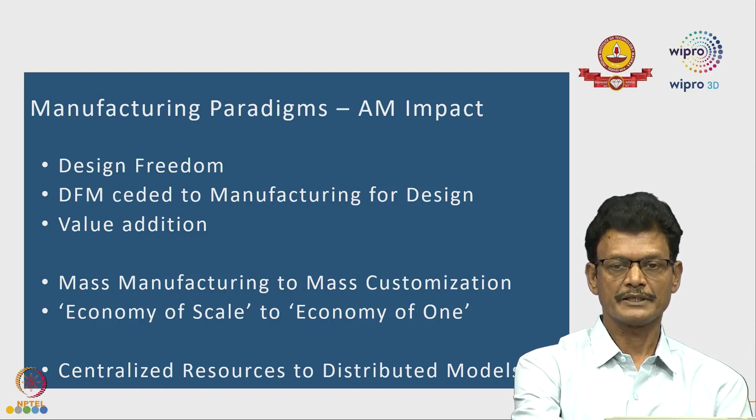And one more important phenomenon that we have observed in recent times is that because of the introduction of additive manufacturing into the product development cycles, the dependence on centralized resources has become insignificant. We are seeing more and more case studies where distributed manufacturing models are coming to the rescue of accelerated product development cycles. So in this program, I am going to talk about various AM technologies.

If you are talking about additive manufacturing technologies, you have a plethora of options, right from tabletop machines to completely matured systems for industrial contexts. And concurrent to this development in the variety of additive manufacturing systems is the choice of materials. We can work with metals, plastics, ceramics, waxes, composites, and so on. A portion of my presentation would also be capturing these material options.

The process chain of additive manufacturing is very important because we need to account for pre-processing, part building as well as post-processing. All of them significantly contribute to the technical case and business cases. So I will be discussing this with the help of a few contemporary examples. And the important thing that we have seen in recent times is that additive manufacturing is equally useful to a micro or small scale enterprise as it is to a large engineering conglomerate.

It is important to find out the value addition opportunities, and once you identify them, it is possible that you can even think about configuring the supply chain models. So a lot of inputs to the deliberations on the technology are inspired by my firsthand experience while doing certain projects and missions both for Wipro 3D and DRDO.

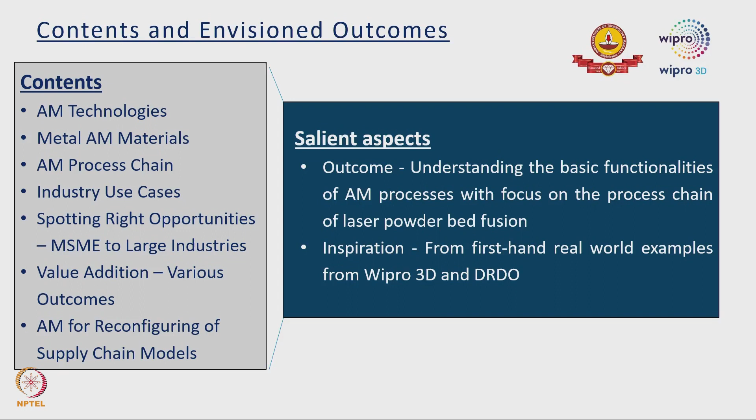Now, let us examine the positioning of additive manufacturing in the landscape of manufacturing. In the current IoT-enabled, Industry 4.0 dominated scenario that is prevalent in manufacturing systems, we are talking about optimizing resources, improving machine utilization, real-time sharing of information based on tremendous sensorization, ubiquitous computing, and more importantly rapid elasticity.

If you just contrast the scenario with that of the early models of manufacturing, where the focus was only limited to increasing production and reducing labor costs, it has been a tremendous metamorphosis. The early models of additive manufacturing came into existence way back in 1980 itself. In fact, the first ever patent for the concept of an XYZ plotter could be credited to Kodama from the Nagoya Municipal Industrial Research Institute in Japan, wherein he talked about producing a three-dimensional plastic object directly from digital definitions.

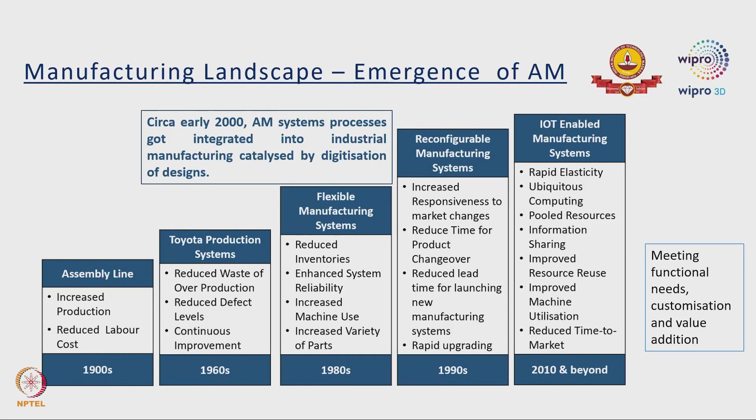So, today we are not looking at usage of additive manufacturing technology only for the sake of prototyping or for design visualization. We are looking at more powerful models through which additive manufactured parts can fulfill the end use needs or functional requirements of real world applications.

Now, if you look at the important aspects of additive manufacturing, there is a distinct phase where we are looking at only digital information. In the initial phase of the process of additive manufacturing, we are working on digital models or CAD models and slicing these models into series of layers mathematically using certain customized software solutions. Subsequent to that, the sliced data is converted into thin layers out of plastics or metals sequentially, so that digital definition is translated into physical part.

So, the point which is to be appreciated is there is a phase which is working only on the digital data, and there is a phase which is largely confined to physical models.

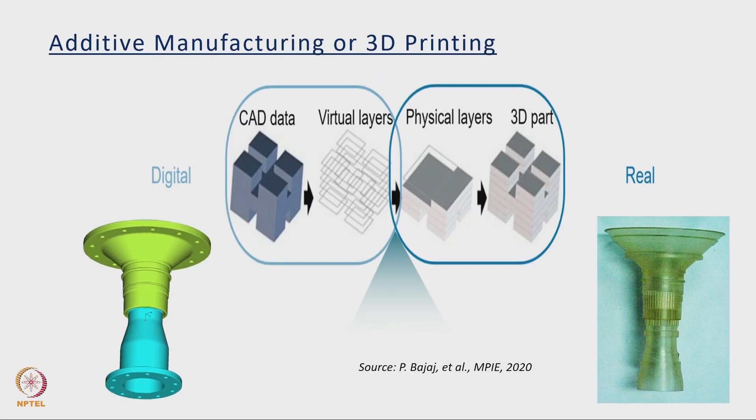It is interesting to know that initially when this technology came into existence, it was more known as rapid prototyping technology. In course of time, several phrases were used to refer to this technology, including layered manufacturing, solid freeform fabrication, and the terminology called 3D printing came into existence because of the research group of MIT that were talking about producing the additive manufactured parts using jetting kind of a principle or inkjet kind of a principle out of plastic materials. But currently the terminologies like 3D printing and additive manufacturing are used fairly in interchangeable manner.

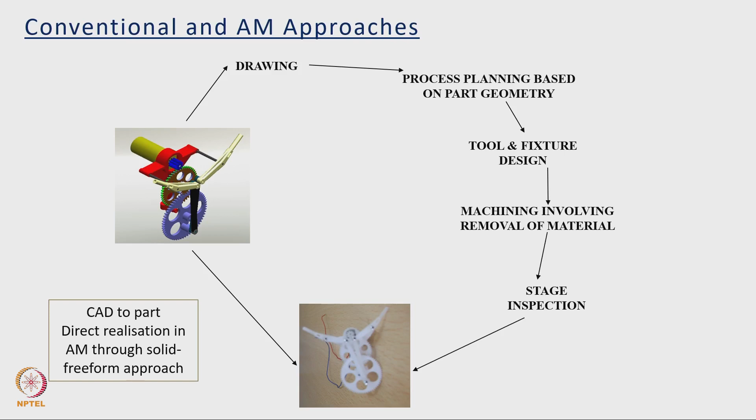So, if you are looking at the conventional manufacturing, what is very apparent is it's sequential from the stage of drawing to the stage of the realization of a part. There are certain steps you sequentially need to follow, including development of the toolings, fixtures, machining, which predominantly involves removal of the material, stage inspection depending upon the complexity of the geometry, and final realization of the part. In contrast to that, additive manufacturing or 3D printing tend to be one step solutions, that is direct translation of the digital data into physical part in a solid free form approach.

So, what is the formal definition of the additive manufacturing? As per the standard ASTM F2792 released in 2009, additive manufacturing can be described as a process of joining materials to make objects directly from the 3D CAD model data, usually layer upon layer, as opposed to the subtractive methodologies. This standard has been replaced by the ISO ASTM standard 52900 released in 2015, but the definition remains the same.

As I mentioned, the terminology 3D printing was coined by the group at MIT, Emanuel Sachs, in 1993, and the Fraunhofer Society is credited with the development of the selective laser melting process through which you can work on range of metallic materials.

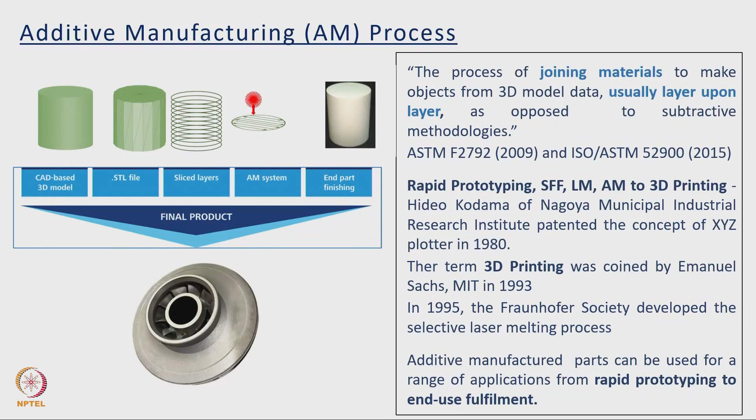And if you look at the materials that can be processed during additive manufacturing, you can see three important categories. Right in the center we have got metallic materials that can be processed through powder bed fusion or binder jetting or direct energy deposition, and you have got a set of processes which are connected with thermoplastics and thermoset plastics, and the others could be connected with processing of sand, glass, composites, fiber optics, even organic tissues. I have shown three examples in this case.

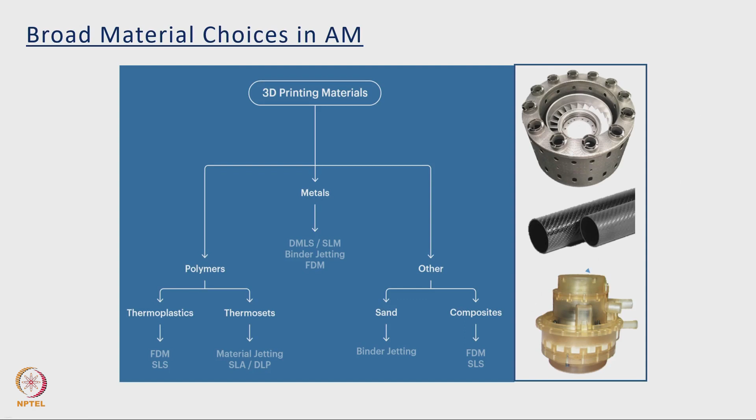Right on the top is the flame tube, which is made from high temperature nickel superalloy made through powder bed fusion. In the bottom you see a transparent bearing housing. In the center you see a composite piping with a thin wall realized through 3D printing out of PEEK like materials.

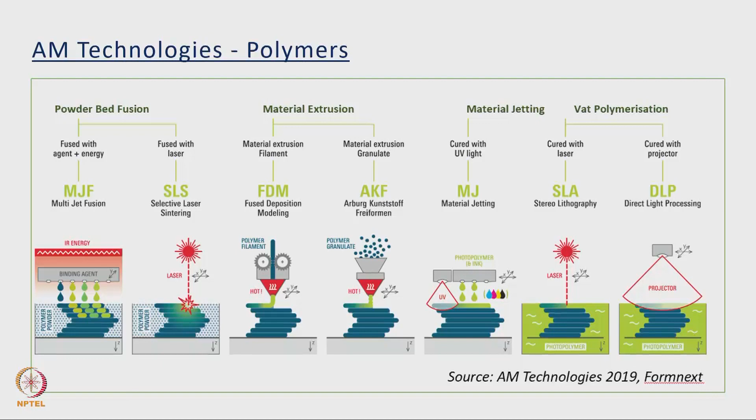So, if you look at the possible options in processing of polymeric materials using additive manufacturing, you can see the important technology that has been available in the commercial form right from early 90s is the VAT polymerization technology. Then you have got extrusion technology, wherein filaments are extruded into the physical parts, and you have got a material jetting technology wherein the plastic materials are jetted out, and the fourth option, a versatile option, is the powder bed fusion. It is also more popularly known as selective laser sintering, which involves the usage of high energy sources for realization of the polymer parts.

Now, let us look at the options connected with metal additive manufacturing. Predominantly you see two varieties in the commercially matured form. The first one is the powder bed fusion, wherein you spread thin layers of powder on the build platforms, make use of high energy sources, could be lasers, could be electron beams, for melting of these particles which re-solidify as the beam passes along.

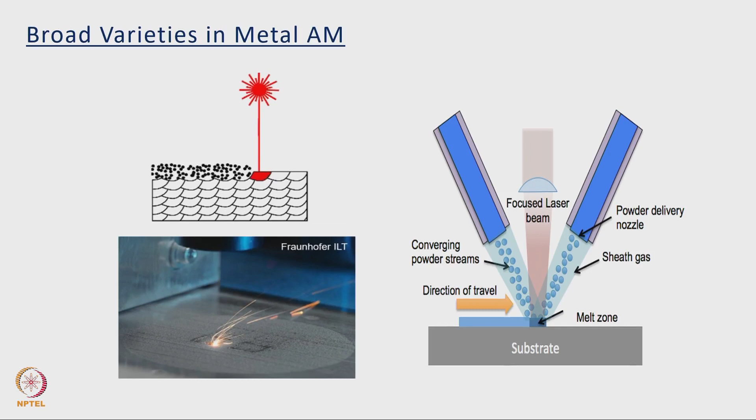On the other side we have the direct energy deposition process, wherein into the stream of the high energy source you are injecting fine metallic particles. So these are two distinct processes used in the world of metal additive manufacturing.

If you look at the categorization of key metal AM technologies with reference to NASA's publication of 2019, you can see three categories corresponding to powder bed fusion, direct energy deposition, and solid state. An important thing to note is the feedstock in case of direct energy deposition could be in the form of powder or wire, whereas in case of solid state it may also involve a foil.

There are a lot of interesting options continuously emerging, but one important option, especially with reference to repair and refurbishment of worn out parts, is the direct energy deposition technique. The cold spray technique, wherein fine powder particles are accelerated in a high velocity compressed gas stream, is one of the emerging options. These particles, upon impact with the substrate, deform and bond together, creating a layer and eventually a predefined geometry.

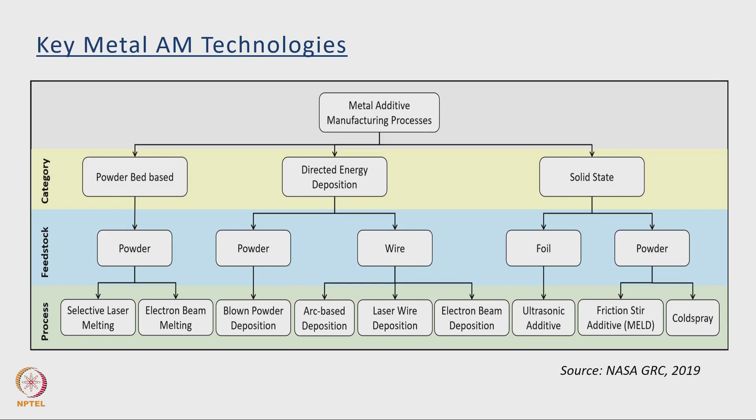So this represents a synergistic combination of conventional manufacturing with additive manufacturing, and this approach is becoming more and more popular as a hybrid engineering approach.

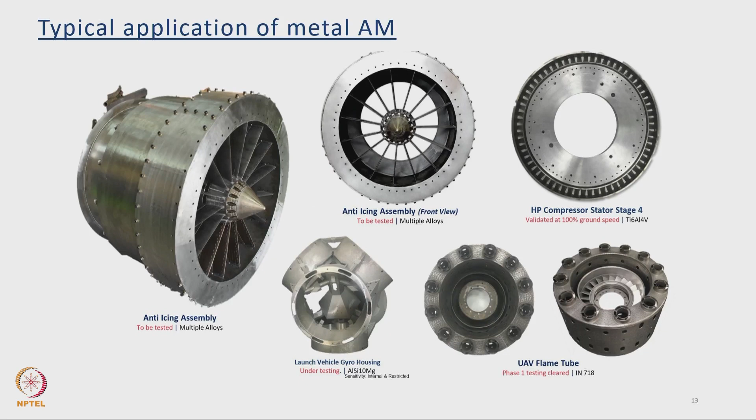If you look at the formal categorization of additive manufacturing technologies as per ASTM ISO standard 52900, you see seven distinct categories of technologies, including vat polymerization, material extrusion, powder bed fusion, material jetting, binder jetting, directed energy deposition, and sheet lamination.

Each of the technologies comes with its own set of possibilities, merits, and associated challenges, but it is very important to note that you need to pick the technology and the material depending upon the application you would like to serve.

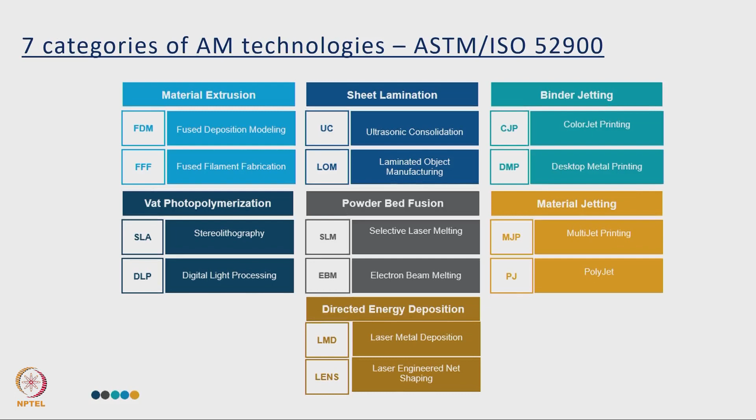One of the recent examples I would like to project is connected with the development of face shields, a very important product during the pandemic situation. The supply chains were severely disrupted, and what you see here is a custom developed face shield with limited access to the supply chains, using multi-jet fusion technology for protection of face, eye, and nose.

Despite the fact that there was no access to injection molding resources in these disrupted times, the MJF technology was used to produce close to 1500 pieces per day.

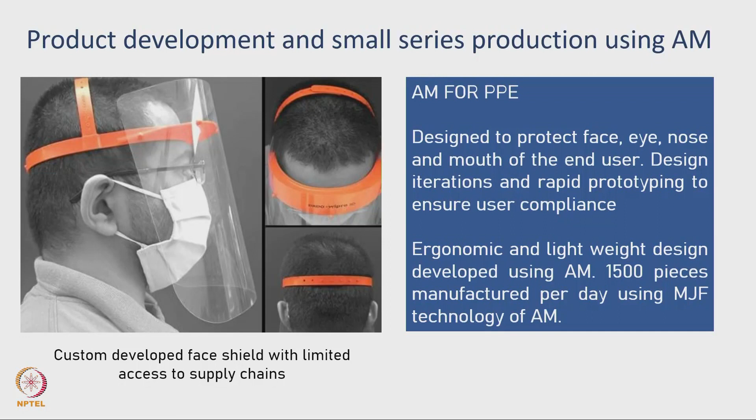In this technology, a fusing agent is jetted selectively where plastic particles need to be processed, and a detailing agent is jetted across the contour or periphery to get top notch geometrical definition. Fundamentally it can process polyamides and also thermoplastic polyurethane kind of materials in steps of 80 micron layers, and small series production of this kind is greatly facilitated using the additive manufacturing technology of multi-jet fusion.

The other example I would like to give, connected with an industrial context, is the application of a stereolithography part. Stereolithography is part of the vat polymerization context. You can see on the left side a full scale bearing housing.

The material is a photocurable resin and it happens to be translucent, so you can even see the fluid motions happening within this part. This full scale bearing housing has been fitted in an attitude test facility, and the movement of fluids within this full scale model of the bearing housing were captured for flow visualization studies.

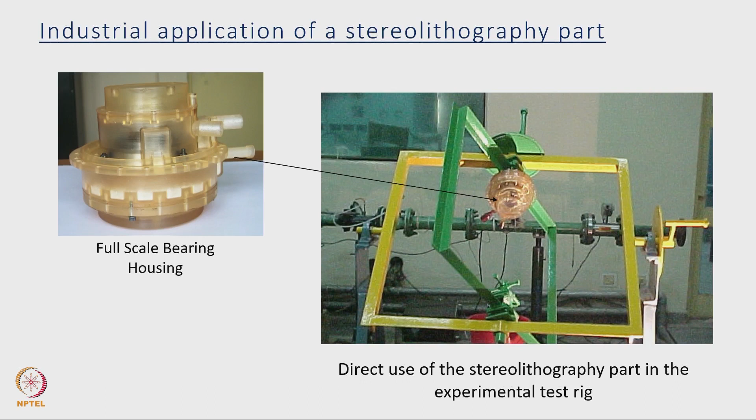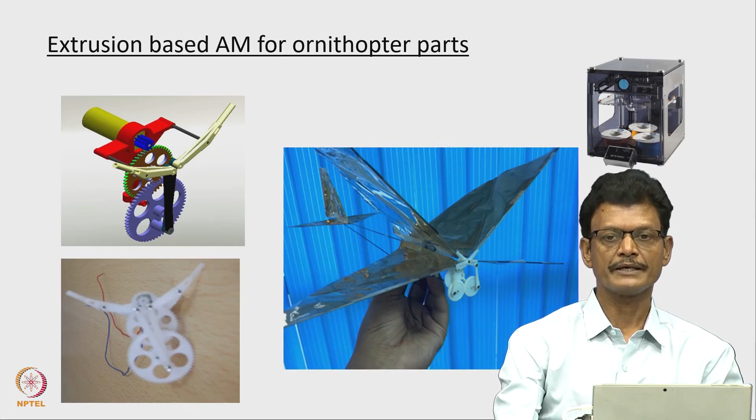So this represents one example wherein a part made out of additive manufacturing was directly used as a test article. The next application is connected with fused deposition modeling, one of the ubiquitous methods of additive manufacturing.

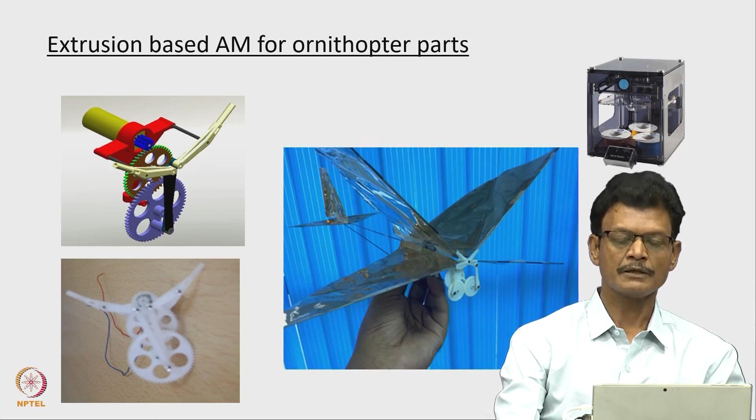In this case, the parts can be made out of thermoplastic materials like polycarbonates, PLA, ABS, glass filled nylon. What you see is a micro sized transmission gear wheel assembly realized directly using fused deposition modeling, fitted into an ornithopter for converting rotary motion into flapping motion of the wings. This ornithopter is ready for field application to demonstrate the thrust and lift generated by this configuration. This is one more example of direct utilization of an additive manufactured plastic part in a real world context, without dependence on conventional tooling and manufacturing processes.

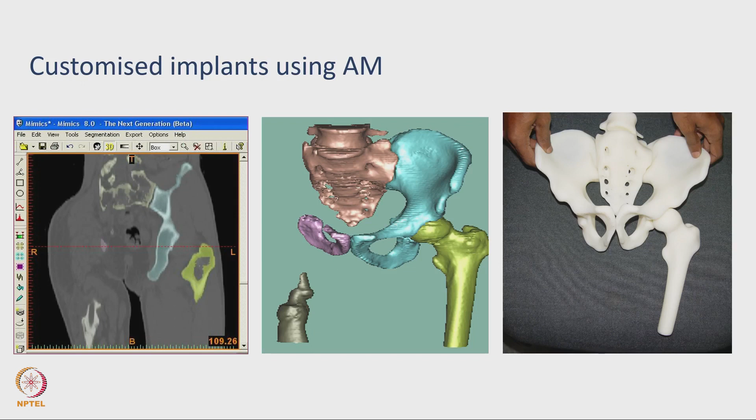This is an example corresponding to customization of implants. You can see here the X-ray data of a patient who has lost a significant portion of the pelvic girdle, and this is the 3D visualization. On the right side is the translation of the reconstructed CT data into a full scale thermoplastic assembly made through fused deposition modeling out of ABS material. This is used both for communication purposes as well as surgical planning - one more example of using an additive manufactured model for planning a complex surgical procedure.

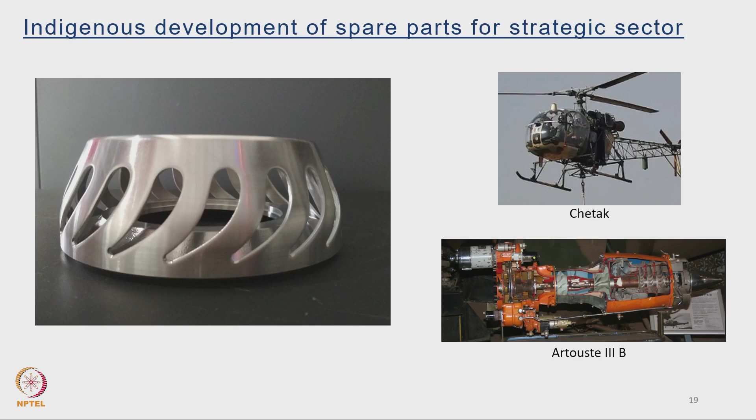This is an interesting example corresponding to development of spare parts for legacy systems. In this case, the stakeholder had access only to the used part, so the geometry had to be captured using 3D scanning, and using that as a reference, the part was made out of powder bed fusion using specialty steels. This is an excellent example of developing reliance in case of spare parts for strategic sectors.

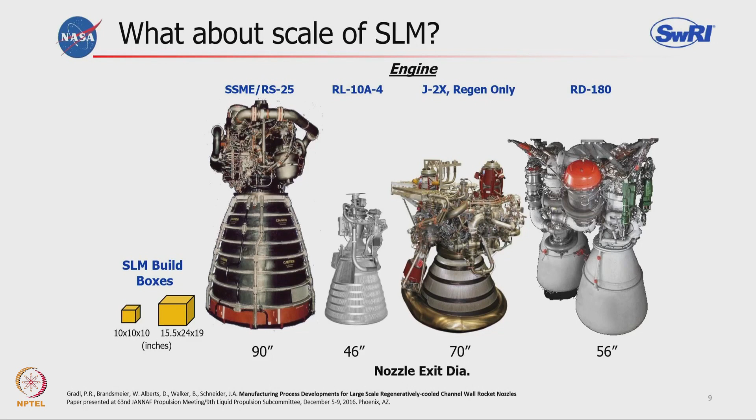There were size limitations in the initial stages because the concept of design for additive manufacturing was still evolving. But if you look at the current set of applications published by NASA in association with the Southwest Research Institute, there seems to be no apparent limitation with reference to the size of the part that can be tackled using additive manufacturing. In the RS-25 engine project of NASA, parts as big as 2.5 meters in diameter with a wall thickness of 6 mm have been realized using additive manufacturing.

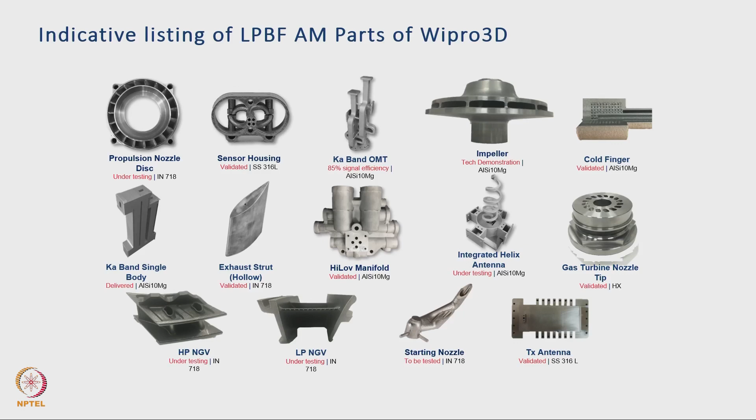The common denominator to all these applications is that the geometries are relatively more complex. In these cases, if you were to rely on conventional manufacturing, the waste associated with converting your design into the part could be significantly high, because you start with a block of material and remove unwanted material with geometry specific tools and processes, and in the bargain you are continuously generating waste.

In contrast, if you employ additive manufacturing for translating designs into parts, especially in case of complex designs, the waste could be significantly less, because you are only adding material at the location of necessity. And hence, in the context of aeronautical systems, a phrase called buy-to-fly ratio has become extremely relevant - the amount of material that you are buying compared to the amount of material which is finally used in the system that is flying.

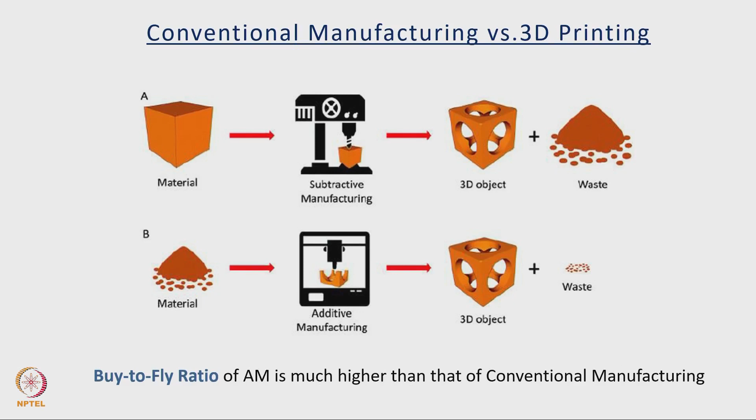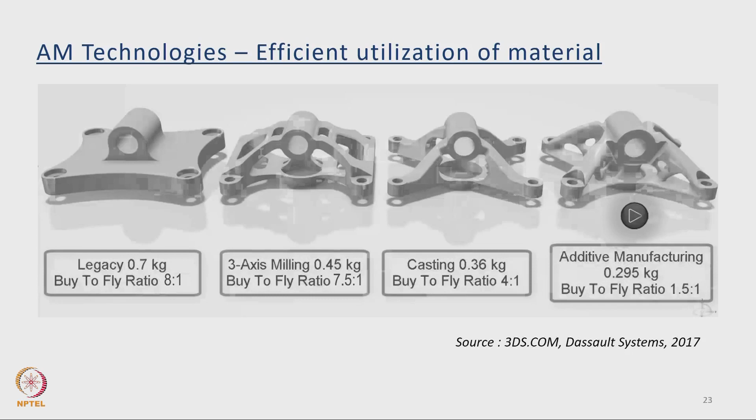In case of conventional manufacturing, the buy-to-fly ratios, whether you are talking about milling, casting, or sheet metal and machining, could range anywhere between 8:1 to 4:1 depending on the geometry of the part. But if you apply the principles of design for additive manufacturing as an alternative to conventional manufacturing, it has been seen in some cases the buy-to-fly ratio could become as favorable as close to 1:1. Coterminous with this concept is also significant reduction in weight, which adds to the overall impact on the system.

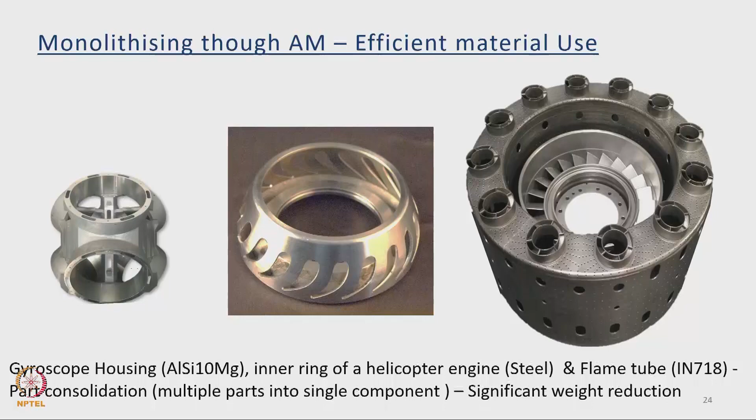One very important thing associated with the application of powder bed fusion in aeronautical systems is the concept of monolithizing, or converting multiple parts into a single part. It is also known as part consolidation, whether you are talking about a flame tube or a complex shaped gyro housing. What has been seen in these cases is significant weight reduction opportunity through consolidation, and the functional requirements may also get additionally augmented.

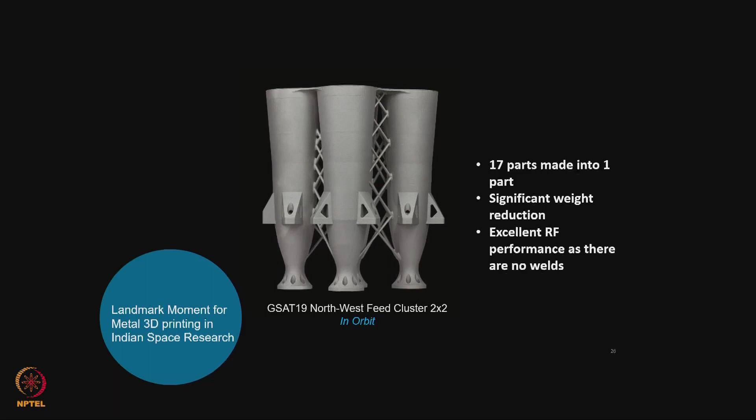So, here is a case study corresponding to the GSAT-19, a communication satellite of ISRO, launched into orbit in June 2017 with a mission life of 10 years. The part shown here is the northwest feed cluster made out of aluminum alloy called AlSi-10Mg using powder bed fusion at Wipro 3D in close association with SAC Ahmedabad.

In this specific case, 17 different parts of the feed cluster were combined into a single part. Naturally, it resulted in weight reduction, significant reduction in assembly effort, and hence compression of the overall development cycle. More importantly, because of the absence of welded joints, the RF quality of the additive manufactured part turned out to be quite superior to the conventional part.

Because of these examples and possibilities, we have seen global leaders like GE giving a new shape to the manufacturing cycle in case of the fuel nozzle, an important part of the LEAP engine, wherein this specific part made out of cobalt chromium alloy has undergone a tremendous change as far as the process is concerned, because of the infusion of powder bed fusion process into the development cycles.

As of 2018, GE has reported that more than 30,000 parts, the nozzle tips, have been made using additive manufacturing, using more than 40 plus metal 3D printers in a 300,000 square feet facility, and each of the LEAP engines contained 19 of these 3D printed fuel nozzles.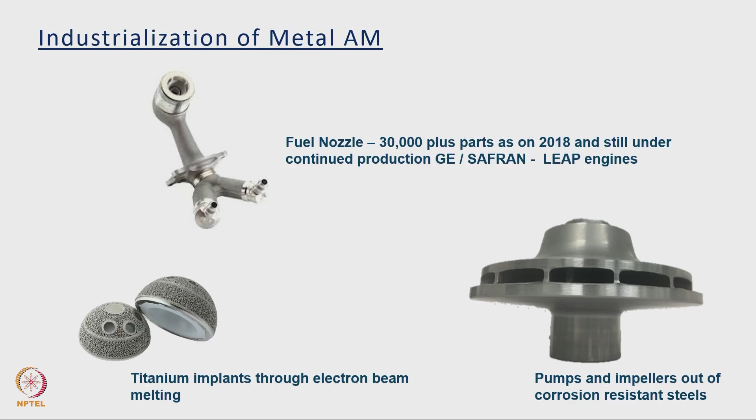And one more significant observation from the energy sector is the manufacturing of pumps and impellers out of corrosion resistant steels. Rather than depending on traditional inventory maintenance systems, they are producing the parts just in time and delivering at the point of care or point of need.

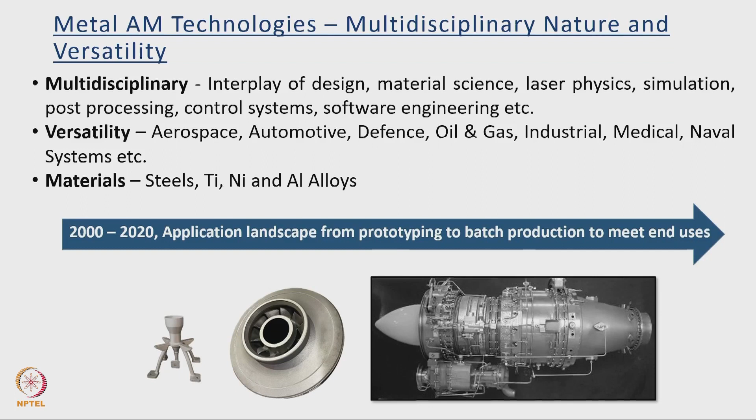So, the current usage of metal additive manufacturing in an industrial context has become an interplay of design, material science, laser physics, simulation technologies, post processing, control systems and software engineering. And you are also seeing a continuous shift in the application landscape from prototyping to batch production so as to meet the complex needs of the end users.

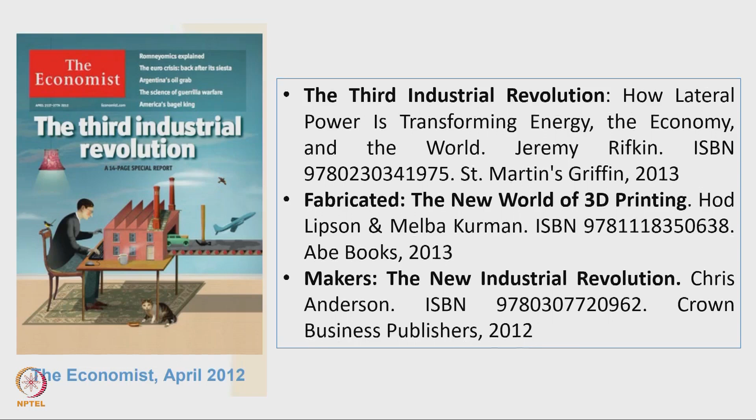Reflecting this kind of improvement in the usage pattern of additive manufacturing, several publications have referred to 3D printing as the third industrial revolution. And during the 2010 to 2015 time frame, many impactful publications brought out how this technology is enabling the next industrial revolution.

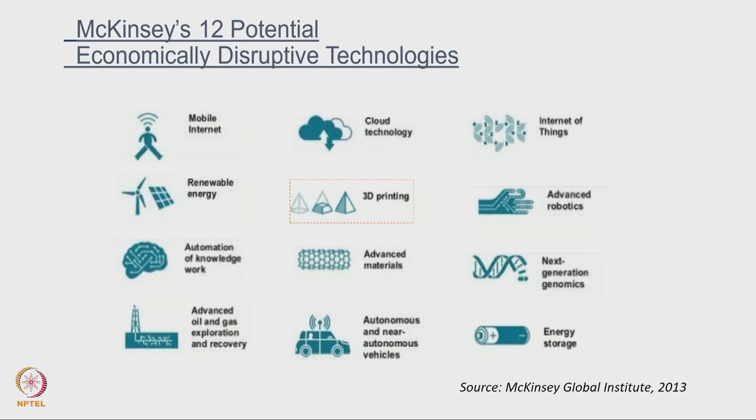One of the important references in this case is the report of McKinsey Global Institute in 2013, wherein 3D printing was placed alongside other disruptive technologies like cloud technology, Internet of Things, renewable energy, advanced materials and energy storage solutions as one important technology that can bring disruption into the way future businesses are run.

So, there was a phase which is synonymous with disillusionment, and we are in a phase where users are able to understand the possibilities in a much better way, and they are also able to spot the specific instances where induction or infusion of this technology can produce parts with the necessary technical as well as business impact. So, what are those instances?

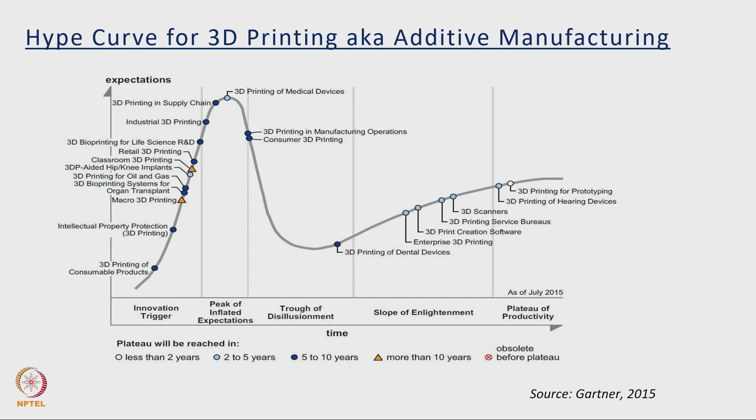When you are talking about aeronautics, there are many gas turbine manufacturers who are able to produce the parts connected with the turbine, combustor, exhaust and compressor modules with a lot of discernible impact on the time compression using powder bed fusion technology.

And they are also able to make use of direct energy deposition technology for repair and refurbishment of worn out parts. We have seen in the automotive sector, especially in the case of electric vehicles and motorsports, metal additive manufacturing and plastic additive manufacturing technologies are repeatedly used for producing even one-off parts and maintaining the competitive advantage compared to the peers. As I explained, in the case of the medical industry, surgical implants and customized solutions for orthopedic, maxillofacial and craniofacial applications are becoming more and more prevalent.

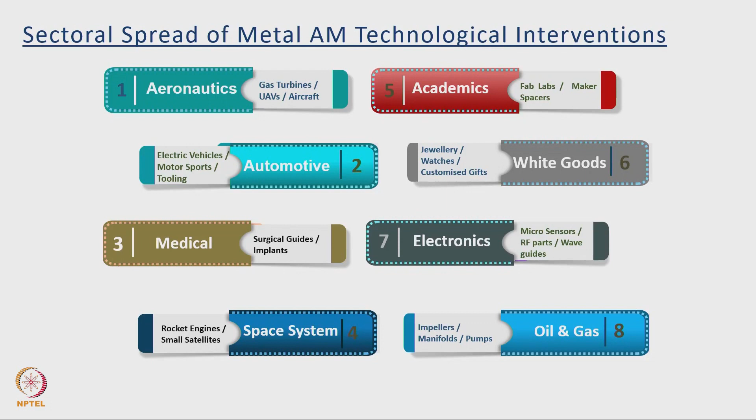In the case of space systems, development of monolithic rocket engines and small satellites have been pursued by research groups across the world using additive manufacturing as an enabler. We have also seen in the white goods sector, customized gifting solutions and the businesses connected with customized gifting have evolved by integrating 3D printing into the supply chain. Similar examples can be cited from electronics and oil and gas, and one important thing in the academic context is the development of fab labs and maker spaces by introducing additive manufacturing as one important constituent technology.

So, with all these applications emerging, we have seen the overall business volume of additive manufacturing has crossed the level of 11 billion US dollars. Approximately 35 to 38% of this business volume is contributed by metal additive manufacturing, and the remaining by plastic additive manufacturing.

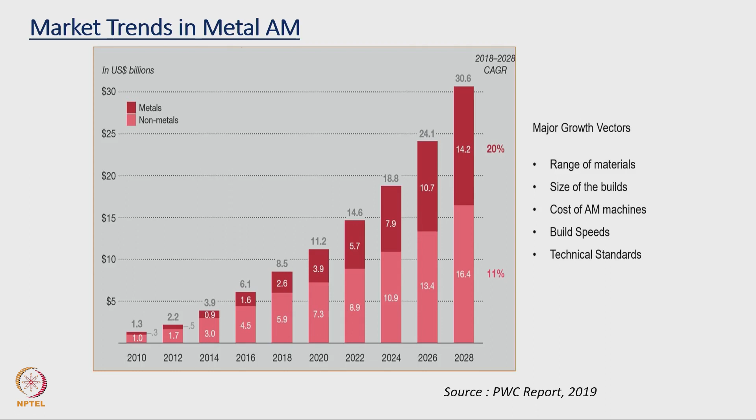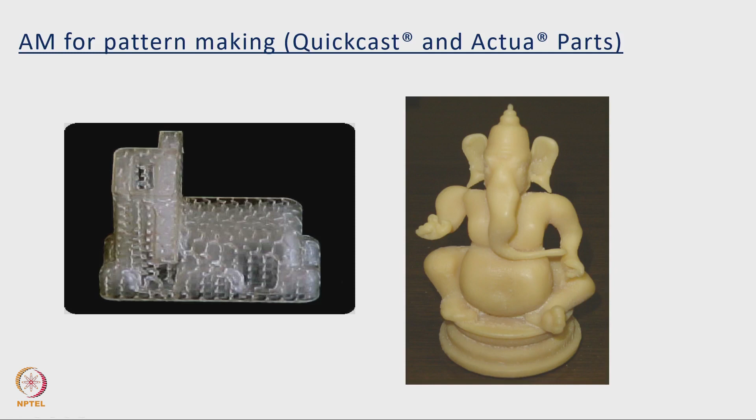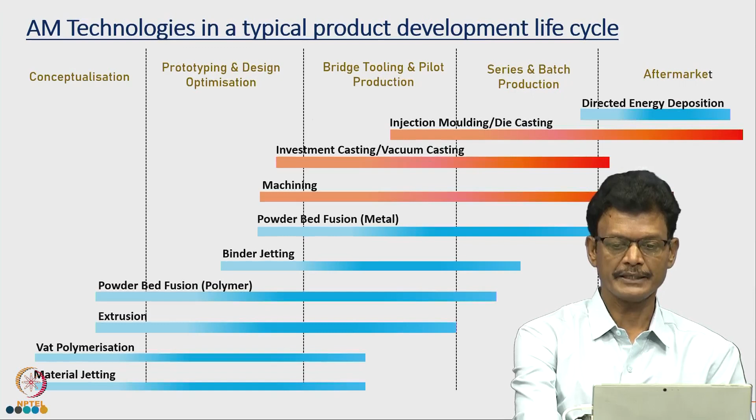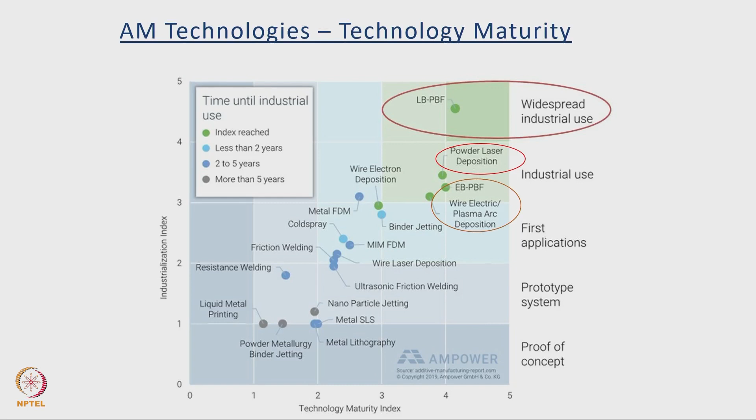So, if you look at the technology options and try to position them with reference to two important vectors, industrialization and technology maturity, you can see that laser powder bed fusion is right on the top. So, it is synonymous with widespread industrial uses. Just below that you can see the powder laser deposition technique, below that the plasma arc technique, and other technologies are also catching up. So, in my coverage of the topic I will give plenty of examples of laser powder bed fusion that signify the matured applications of the technology in the industrial context.

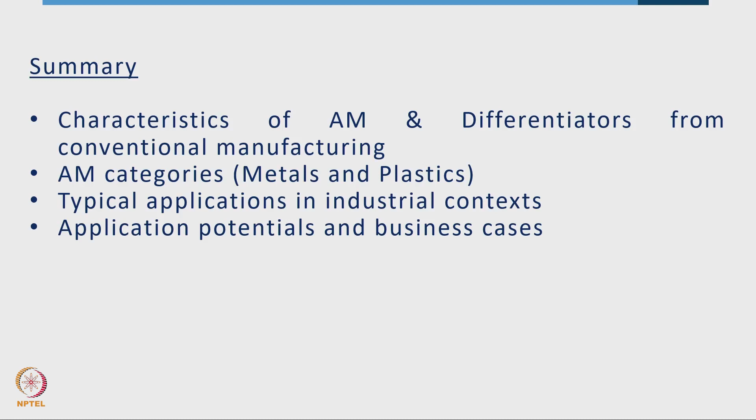Just to sum up, in this first session we understood the important characteristics of additive manufacturing processes, and we also got sensitized to the differentiators vis-a-vis conventional manufacturing. We also discussed the various categories of additive manufacturing technologies based on operational principles and compatibility with different materials, and the business cases and application potentials of these technologies have also been discussed in brief. We will further explore the typical applications of these technologies in various facets of product development in the ensuing session.